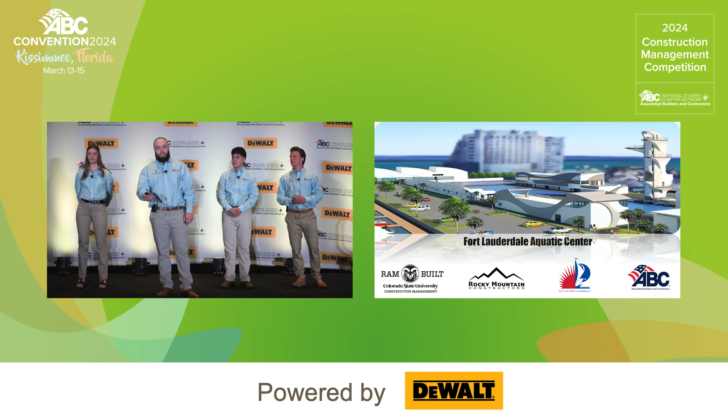Well, first of all, before we start, on behalf of Colorado State University and Rocky Mountain Constructors, I just want to say thank you so much for this opportunity. It's been an awesome handful of weeks working together and delivering this big package to you for the Fort Lauderdale Aquatic Center. Here's our presentation.

First, let's meet the team. My name is Aiden Flint. I work in the PCS department at Rocky Mountain Constructors. I am your pre-construction manager for this project. I will be working on your budget, your risk assessment, and the constructability reviews. My name is Natalie. I'm your senior safety manager for this project, and I will be addressing all safety concerns during the project.

My name is Ethan Field. I am your senior superintendent. I will be your main point of contact for any field questions you have throughout the project, as well as post CO. My name is Joel Ibarra. I'm your project manager, and I'm going to make sure there's effective communication between trade partners, ourselves, and you, the owner. Thanks, team.

So a little company overview and background of who we are. We were headquartered and founded in Denver, Colorado, founded in 1946 to be exact. Some sectors we specialize in, obviously commercial development and construction, hospitality, water and wastewater, infrastructure, and pool construction, just to name a few. Some construction services that we specialize in, other than general contracting, would be construction management services, design build, and pre-construction services.

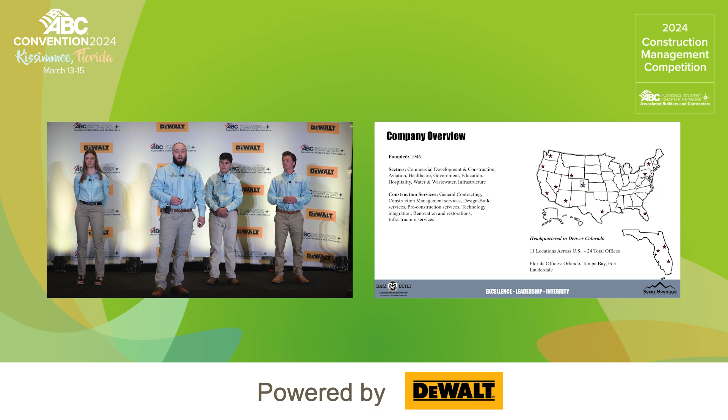Like I said, we're headquartered in Denver, Colorado, but we do have 11 locations across the US, totaling at 24 total offices, 3 of those offices being in our home state of Florida and our home city in Fort Lauderdale.

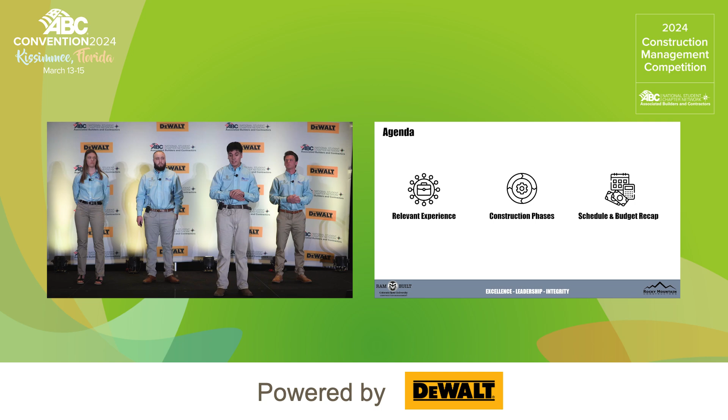Before we begin the bulk of our presentation, we just want to give you a quick agenda of what we're going to talk about today, that including our relevant experience and some of the aquatic center projects we have already worked on here in Florida. Then we'll jump into our construction phases, talk about our 5 major construction phases, one of those including the additional scope added to the project, and end off with the schedule and budget recap.

Awesome, thank you, Joel. So some relevant experience and some relevant projects that we deemed to be successful for your project. One being the Marguerite Aquatic Center complex in California. The next being the Coral Springs Aquatic Center in Florida. And then lastly, the Florida Aquatics Swimming and Training Center.

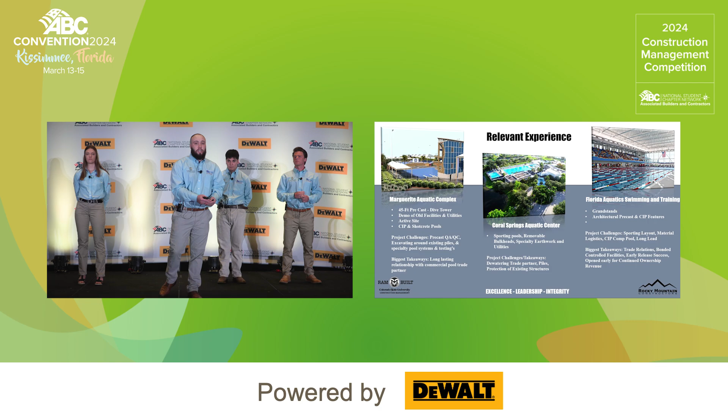All of these projects have had precast members, a lot of cast-in-place concrete, as well as dive towers, grandstands, removable bulkheads, and sporting pools just like your project. Some big takeaways we had from these relevant projects were that we gained good relationships with our pool subcontractor and our dewatering trade partners that we'll be using for your project.

So I just want to go over a top 5 cost breakdown. I want to highlight the top 5 scopes that have the most costs allocated to them. First, we'll be starting with Division 13. This is your special construction scope. This consists of your entire swimming pool package to streamline things for ownership. This also consists of your sheet piles and your bracing, your electronic timing and your scoreboard systems, as well as your grandstands package.

Next, I want to dive into Division 3, your concrete scope. This comes just over $8 million. This is all other cast-in-place concrete, not including those of the pools. This consists of your scoreboard foundation and erection, your pool decks, your slab on grades, and your subgrades such as the grade beams on your project. This scope also will include your complete dive tower package.

Next, I want to dive into Division 31, your earthwork package at $5.5 million. This is your entire earthwork package, including the excavation for those pools. This is also going to cover all of your auger cast grout and helical piles. Next, I wanted to combine your MEPs. The MEP, electrical, mechanical, and plumbing, comes at just over $3 million. This is the entire package for all of your MEPs.

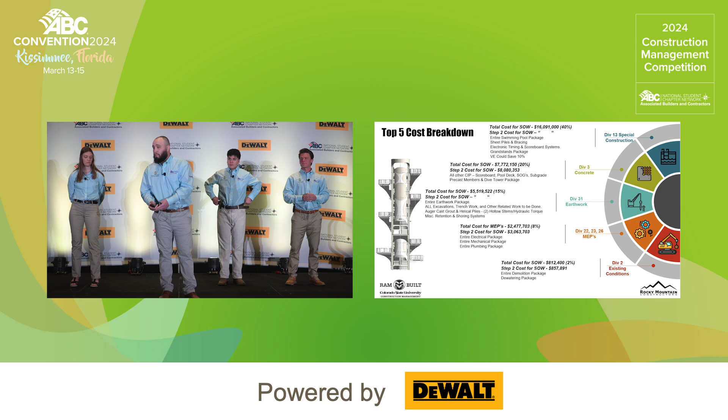Lastly, I wanted to cover your Division 2, your existing conditions. This is just under $900,000, and this consists of your entire demolition and your entire dewatering package for Step 1 and Step 2 of construction.

Our first major phase is Phase 1, which consists of initial mobilization, initial demolition, and underground utilities. Before we actually begin Phase 1, we're going to do our permitting process, which consists of procuring and obtaining all necessary permit items to ensure that we could start construction. Then we'll move to our procurement, getting our procurement items.

We submitted a procurement log / submittal log to the judge panel and to the owner, listing all of the critical items for the different phases of construction. Some of those include, but not limited to, the dive tower shop drawings and fabrication process, as well as the elevator and the Musco lighting features.

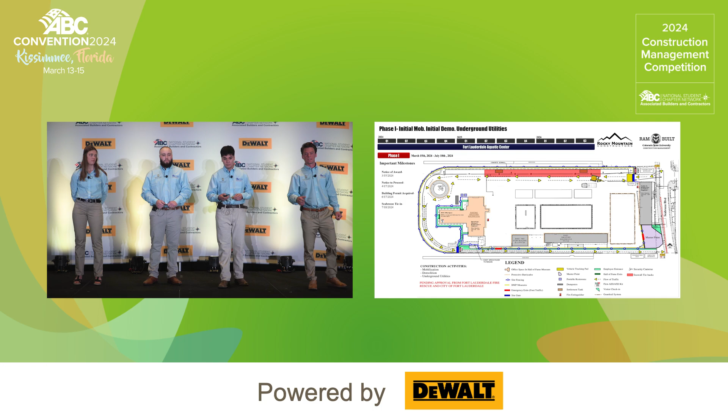Thank you, Joel. A few things I want to point out for the site utilization plan is our traffic flow. Our main entrance will be on the east side. We have a muster point and visitor check-in on the southeast side.

We will be installing our settlement tanks as well as our dewatering wells in preparation for our excavation. We will be self-performing the demo work of the asphalt road on the north side of the construction site, and then begin our utility tie-in from the water main to the Hall of Fame building.

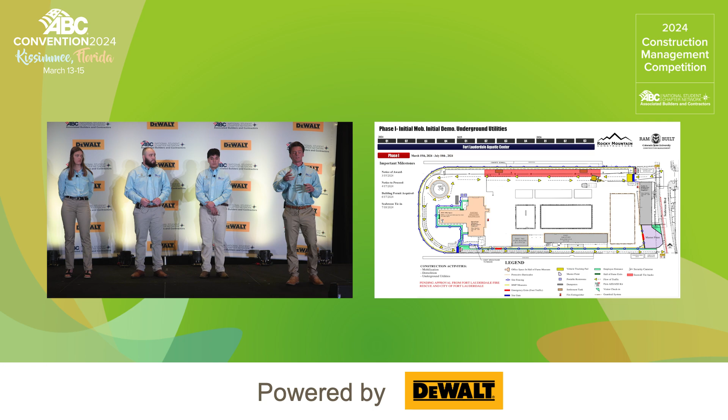Thanks, Ethan. At RMC, our top priority throughout all of our projects is safety. As such, I will be highlighting the main safety concerns throughout each phase in the project. Plans show existing seawall tiebacks on the north end of the site, located on our site utilization plan in the red area. To avoid contact with these members, we will be implementing a permitting process for all trades working in this area.

In addition, demolition of existing buildings will start during phase 1, so we will ensure that abatement testing is completed prior to demolition to give ample time to alert the owner if any hazardous materials are found.

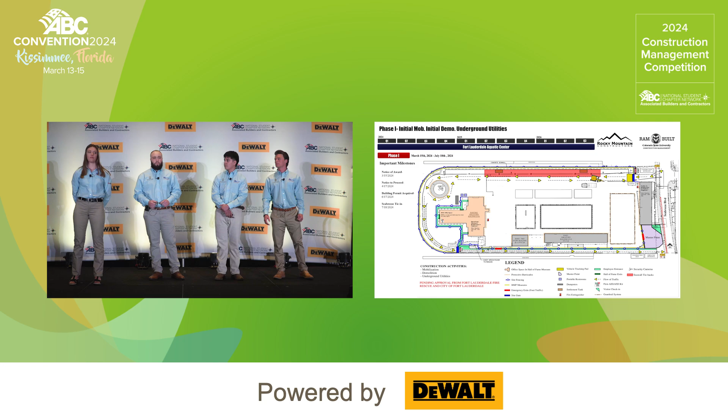Thank you, Natalie. This leads us to our phase 2, which consists of our heavy demo, heavy excavations, auger cast piles, and our helical piles. As your project manager, I would ensure that we look ahead into phase 3 during this phase to ensure that, again, we procure and look over the fabrication of the dive tower. That way we have it installed before any hurricane season comes along.

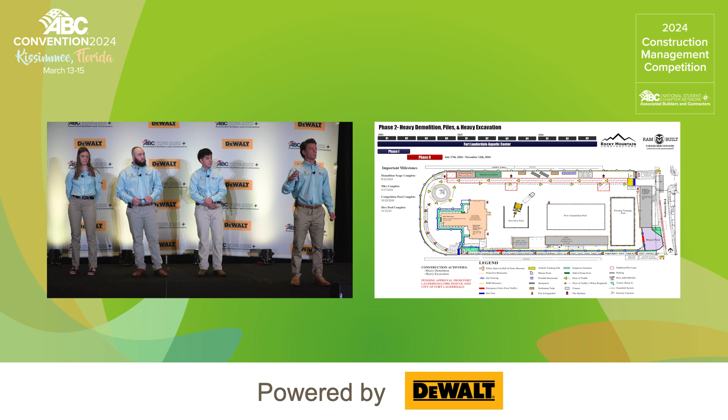Thank you, Joel. Before we begin any demolition and excavation, we'll be receiving underground utility clearance from utility companies as well as the respective AHJs. I would like to point out the temporary parking we have for any owners or inspectors, and I would like to hand it off to Natalie.

Thank you, Ethan. During phase 2, with heavy demolition and excavation activities, we have included a contingency for 24-hour site monitoring. This will allow us to monitor the site continuously and also give us the opportunity to view time-lapse construction and address any concerns as necessary.

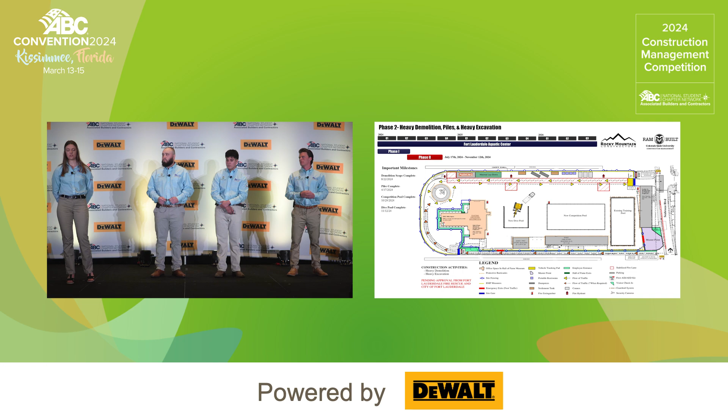Perfect. This leads us to phase 3, which consists of subgrade foundations, new facilities, new pools, and then that new dive tower. Like our last phase, we want to ensure that we are working towards phase 4 as your project manager. We will be looking into getting our checklist and any other documentation ready for commissioning so that process is smooth.

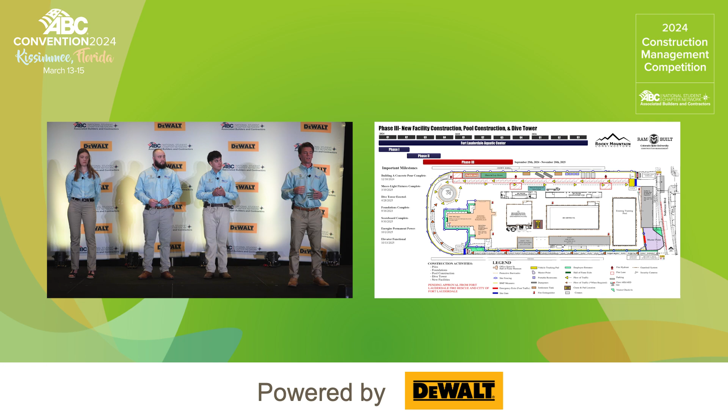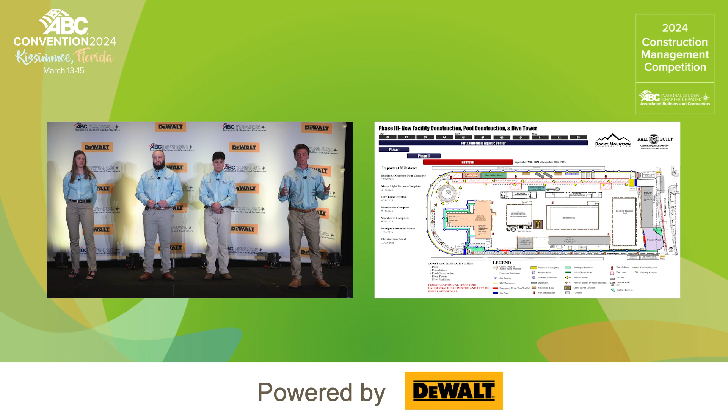So for phase 3, we will be constructing our pools, first starting off with the competition pool and then the dive pool, and then the other buildings after that. I'll be working closely with our trustworthy pool contractor, Jack Jamber. We've been working with them on the past few projects. We absolutely love working with them, and I'll hand it off to Natalie after this.

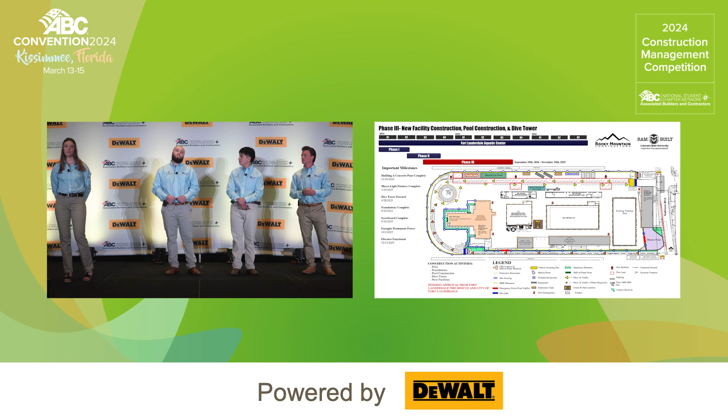During phase 3, our top safety concerns lie within the heavy crane activity and erection of the precast dive tower. Through careful calculations, we have determined a 250-ton crane necessary for the erection of the dive tower. This will put the crane at roughly 75% of its capacity without nearing its maximum. In addition, we will be using a 20-ton mobile crane as necessary for large picks such as the RTU on Building B, as well as the scoreboard.

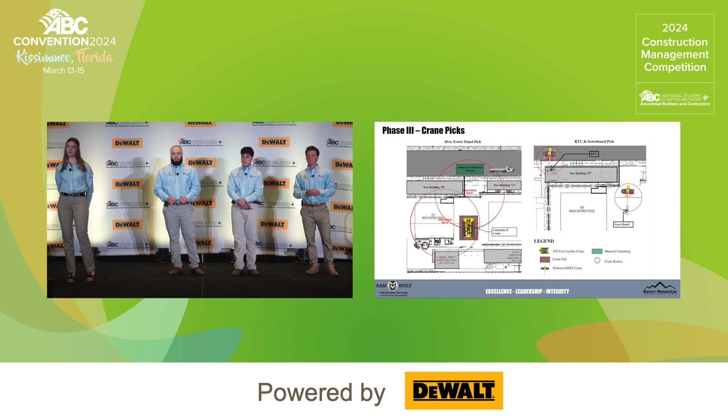Perfect. Thanks, Natalie. And this leads us to phase 4, which is our site improvements, punch list, and commissioning process. As mentioned, I'll be working with our superintendent, Ethan, to ensure that you're guided through the commissioning process and punch list items effectively, and you understand the step-by-step process for those critical items.

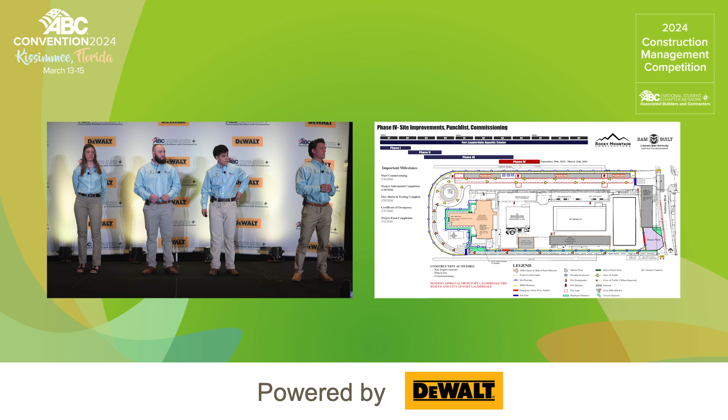Yeah, I will be performing pre-functional checklists with our quality control manager, Spencer, before any inspectors come and take a look at what we've completed. I will be keeping track of any loose end items and punch list items on the software of choice.

And Natalie? Or, yeah. Cool.

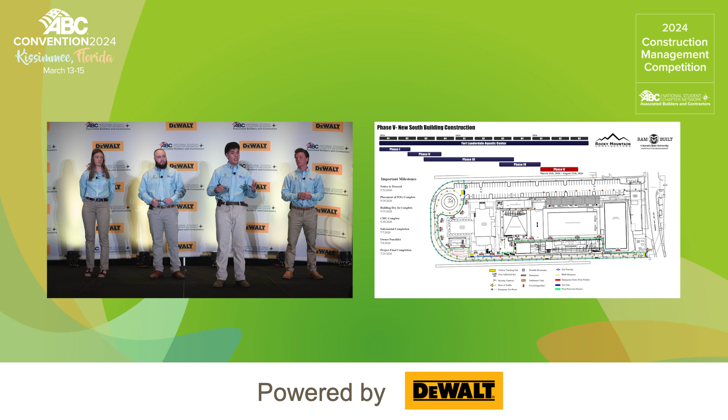And this leads us to our additional scope of work added to the project. First and foremost, we want to congratulate you for allocating the budget to build the new south building. We have this currently happening after phase 4, but as a project team, we would like to further collaborate with the city and the owner to ensure that we're effectively able to add that scope of work into our phase 3, which would save you 2 months of construction activities.

Awesome. Thanks, guys. So let's just go over a quick schedule and budget overview. Some VE items that we want to discuss with you: utilizing shotcrete for these pools instead of cast in place. This might save you 10% on your cast-in-place material. Next, I would like to recycle all that demo material that we're taking off your site and give that money back to you. Next, something we want to further discuss is the use of office space rental for those employees entering the West Building, rather than having all those temporary logistics set up.

Some general overview of our company and our PCS department. We have a repeat client rate of 99.2%, as well as a bid acceptance ratio of 8 to 10, meaning every 10 projects we bid on, we win 8 of those.

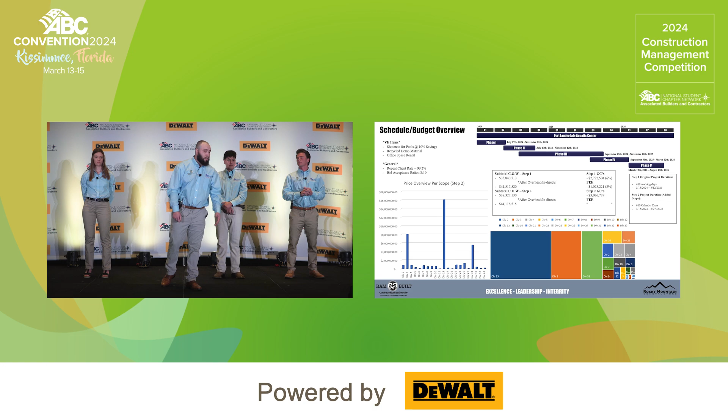Now, your original project schedule is 2 years, but now with that additional added scope, we're looking at 2 years and 5 months. Again, with the owner and any other stakeholders, we'd like to collaborate further and discuss our plan in bringing that phase 5 into our phase 3 sequence to shorten the timeline by 2 months. And finally, to overview the total cost, including step 1 and step 2, you're looking at just over $44 million.